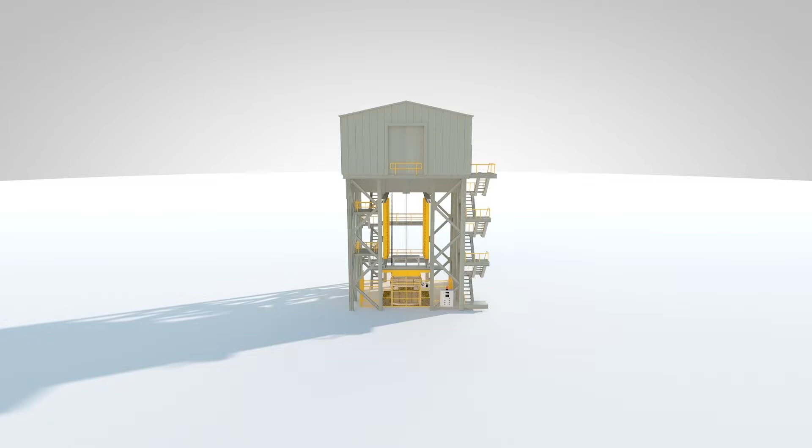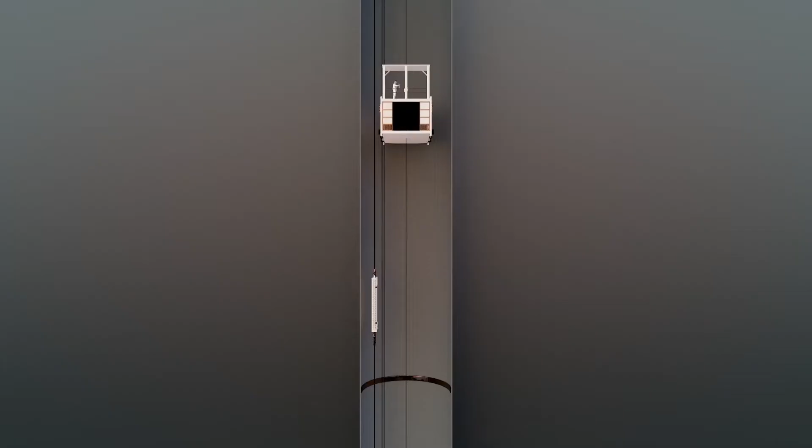Whilst conducting a daily inspection at 2:27pm, a shift deputy noticed that at the point where the counterweight and man-riding cage pass, the counterweight appeared misaligned. The deputy contacted the control room operator to advise them, then continued with his inspection until he reached pit bottom, 412 metres below the surface.

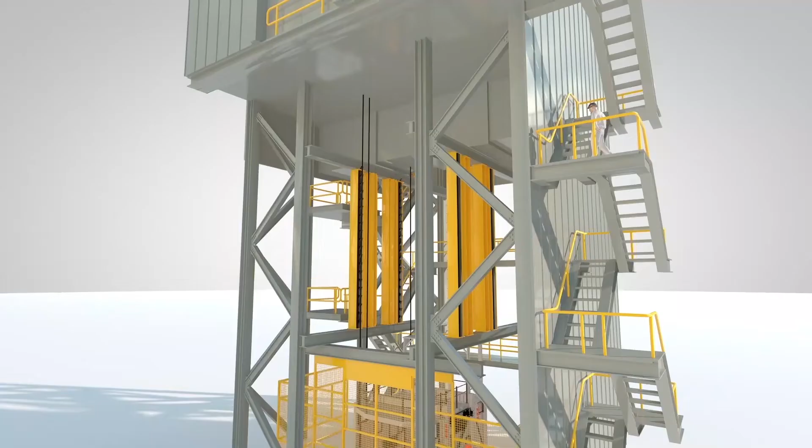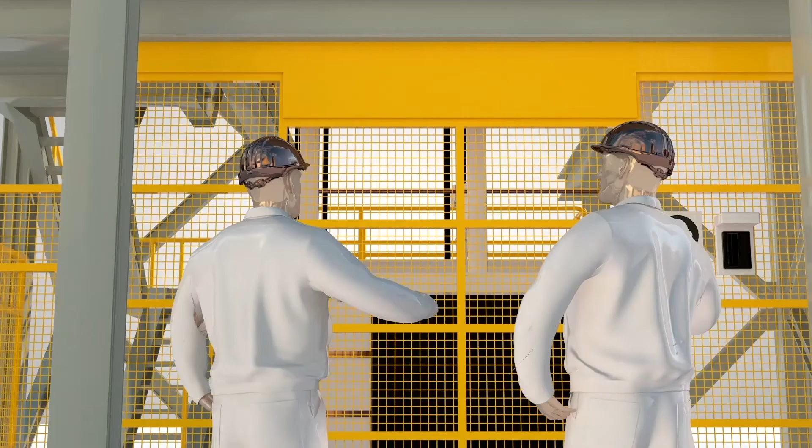Engineers were informed of the misalignment of the counterweight. A mechanical engineer attended the shaft winder to investigate. While the mechanical engineer was investigating, a work crew and the deputy travelled to the surface using the winder without encountering any problems. The deputy then discussed his observations in relation to the misaligned counterweight with the mechanical engineer.

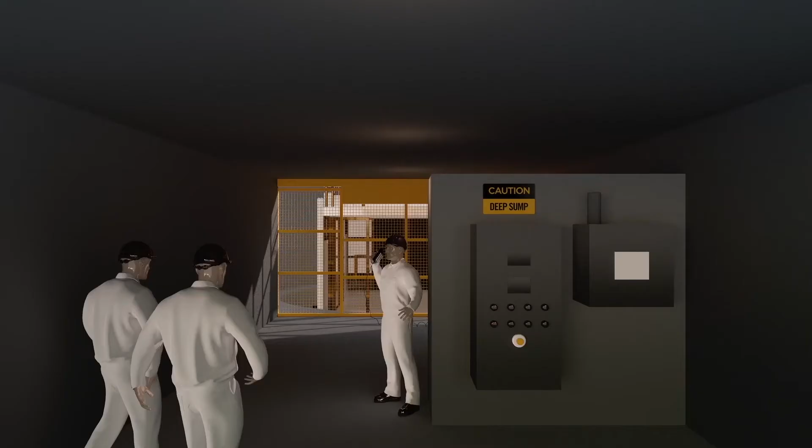At 3:20pm, about 60 afternoon shift workers travelled to the pit bottom. They felt vibrations and heard noises. Immediately after the crew arrived at shaft bottom, a shift deputy contacted the control room to report the unusual vibration and noises. At 3:26pm, two workers walked past the deputy on the phone and entered the number 3 shaft conveyance and began to travel to the surface.

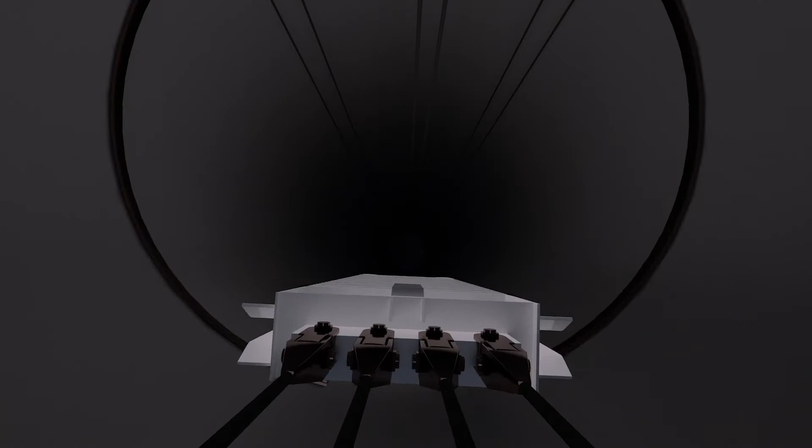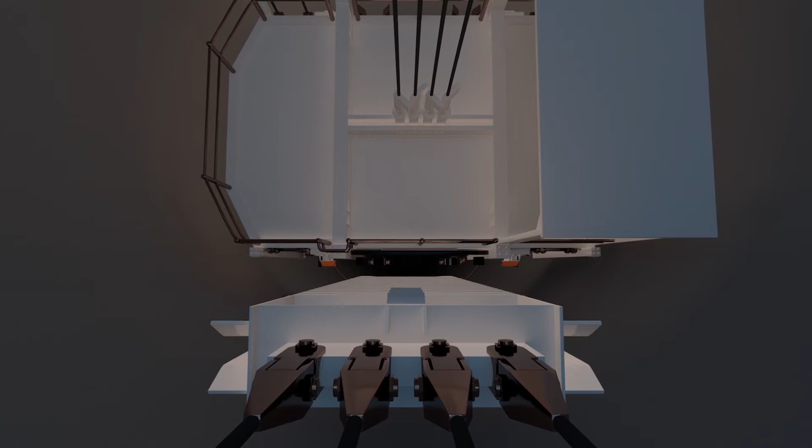The shaft winder uses 4 head ropes. When all 4 ropes are of equal tension, the net torque on the counterweight is 0. When there is uneven head rope tension, a rotational torque is applied to the counterweight. The investigation identified that the rotation of the counterweight was generated by out-of-balance head rope tensions.

As the tension variation in the head ropes increases, the wear rate on the drum groove liners accelerates due to rope slip. This further aggravates the variation in head rope tension.

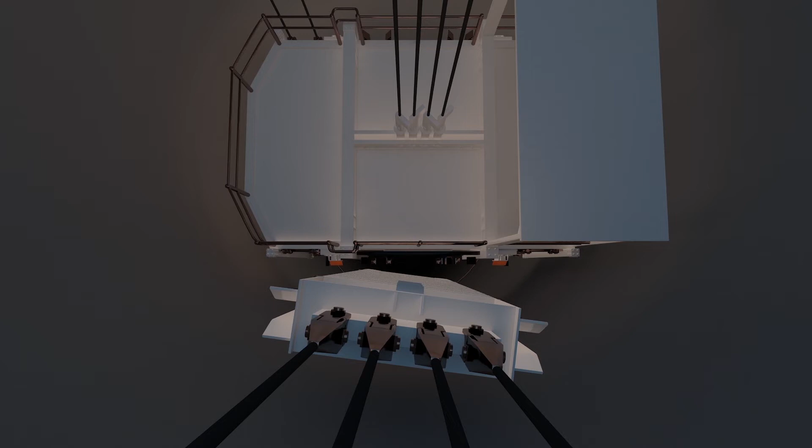At the time of the incident, there was a variance of up to 4.5 millimetres between the 4 head rope drum grooves, which over a depth of 400 metres would result in a 1.456 metre difference in rope travel between the ropes. The rotation of the counterweight meant that it was possible for the counterweight to contact the conveyance or the shaft wall whilst it was in motion.

Other causal factors include the maintenance and inspection scheme did not recognise the criticality of the balanced head rope tensions. Early indicators were not recognised and properly communicated to senior personnel to action.

Mine operators should review their safety management systems relating to shaft winding systems and consult with appropriately skilled people to identify the control measures that are critical to maintaining designed clearances and safe operating limits.

Developing or reviewing defect reporting systems to include subjective and verbal comments by the workforce. Maintaining accurate records for all baseline data.

Challenging the effectiveness of maintenance tasks to provide consistent outcomes to maintain a safe state and clearly identify a deviation requiring escalation and/or isolation of equipment.

Identifying the critical tasks in the maintenance management system and a response plan if those tasks are not completed. Considering a change of duty that should trigger a review of the maintenance schedule.